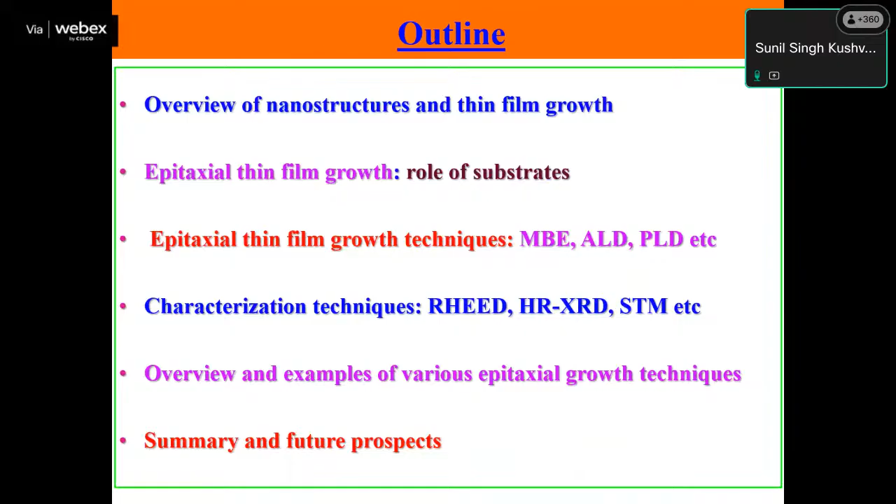Hello, yes sir, now your audio is really very clear, and we can see your screen. Okay, so now, sorry, I just connected with my laptop, so I will try to finish quickly. Sure sir, yeah, so anyway, so basically we know these nanostructures.

Now I am moving towards why these nanostructures make it unique and interesting. I think this talk has already been going on for the last almost 1 month. This is the quantum size effect, one of the parameters - the quantum confinement effect. This is the basis for having these quantum materials as well. Of course it depends on the dimensionality of the materials, whether it is three-dimensional, two-dimensional quantum well, quantum wires, or quantum dots. And then the density of states function changes clearly when we have a change in the system's dimensionality.

When we are going to fabricate these devices, or even futuristic devices based on quantum materials for quantum computing and others, there are two different approaches for fabrication. One is the top-down approach, where we use nanolithography, lithography, etching, and EBL systems for nano devices. For example, Intel's 45 nanometer technology is made using the lithography and etching process. Another approach is the bottom-up approach, using manipulation with STM, or even self-assembly processes.

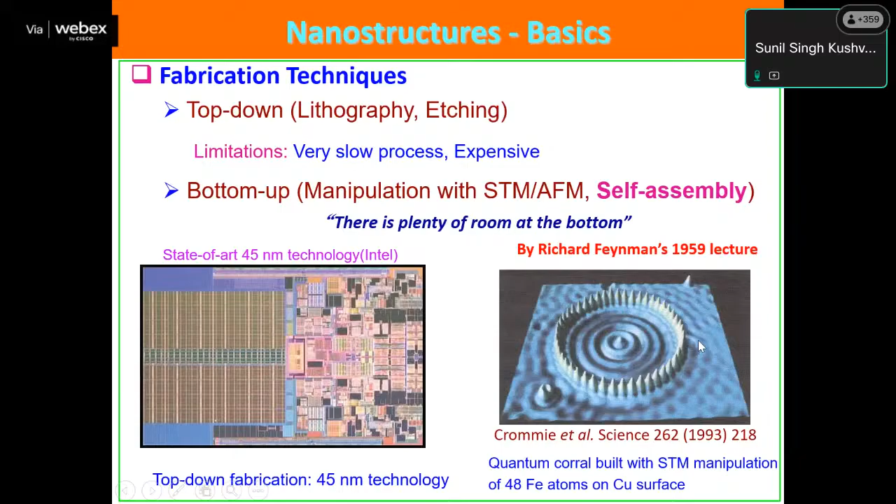You can see these quantum waves, meaning standing waves, inside the materials. That's another story, but today I am going to focus on why we are interested, especially in the epitaxial thin film growth of self-assembled nanostructures.

When we talk about self-assembly, it means it can be formed in the growth environment taking advantage of energetic, kinetic, and geometric effects. There is no need for lithography, and it is very low cost with a parallel process.

But the remaining problems we need to solve one by one are precise control of the size, shape, type, and location of nanostructures, and more importantly, understanding the growth mechanism.

This means we need to know how to control the morphology, or how we grow a single layer or multiple layers. It depends on knowing the kinetics, surface thermodynamics, and mechanics.

When it comes to real thin film growth mechanisms, there are three basic thin film growth mechanisms. One is called the Frank-van der Merwe mode, which we also call layer-by-layer growth.

In this case, what happens is when the substrate surface free energy is more than the interface and film energy, then your film grows in a layered structure. For example, we have grown gallium nitride on gallium nitride, and you can see this layered structure has been grown.

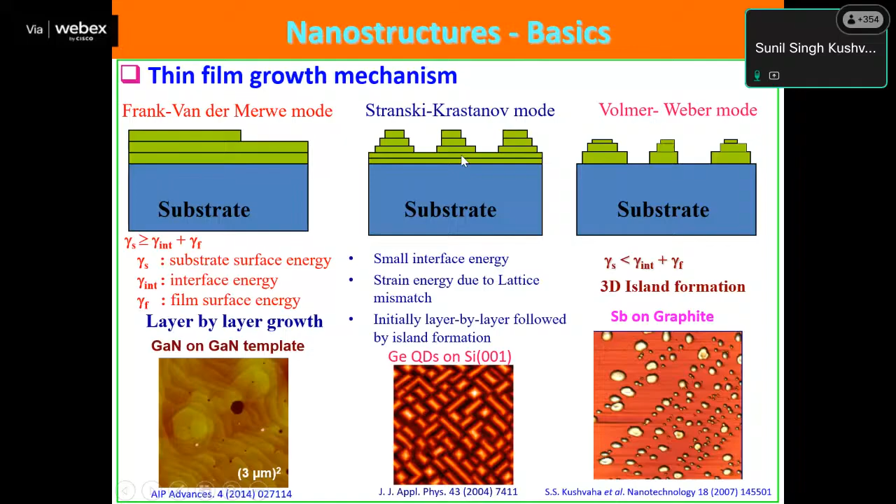Now, as my topic is to discuss different epitaxy growth systems, first I would like to give some idea of what we mean by epitaxy growth.

Generally, when we grow film on substrates, it depends on the growth temperature, growth rate, the substrate, and the growth technique. Accordingly, we get mostly 3 to 4 different kinds of crystalline structures when we talk about this.

One is the amorphous structure. People even use amorphous silicon for silicon solar cell applications, but for most devices we are not interested in growing amorphous structures, because these amorphous solids or liquids have no long range order. This means we don't know the quality, the morphology will certainly be different, and there is no periodicity or even local periodicity, making it very hard to know what we are growing.

Another is the polycrystalline film. So basically, this polycrystalline film refers to...

We have this different thin film composed of numerous small crystallites or grains, where the film structure can vary in phase content, nanoparticle size, and thickness, influenced by the synthesis conditions. And third is the single crystalline.

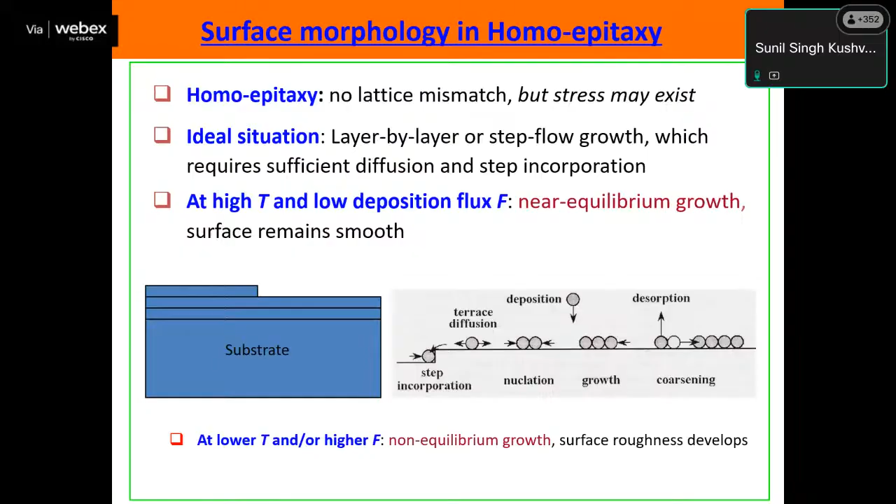So for example, at low temperature with high flux, you can get some kind of nucleation start, but again you have the layered structure. Here again you have this kind of pits or defects on the epitaxial layer. This means that with temperature and growth flux, the transition should not be transient, it should be very smooth. Whether temperature and flux are optimized determines how you can control the roughening of the substrate.

So of course that's one of the requirements when you are going for precise doping or making a smooth homoepitaxial layer.

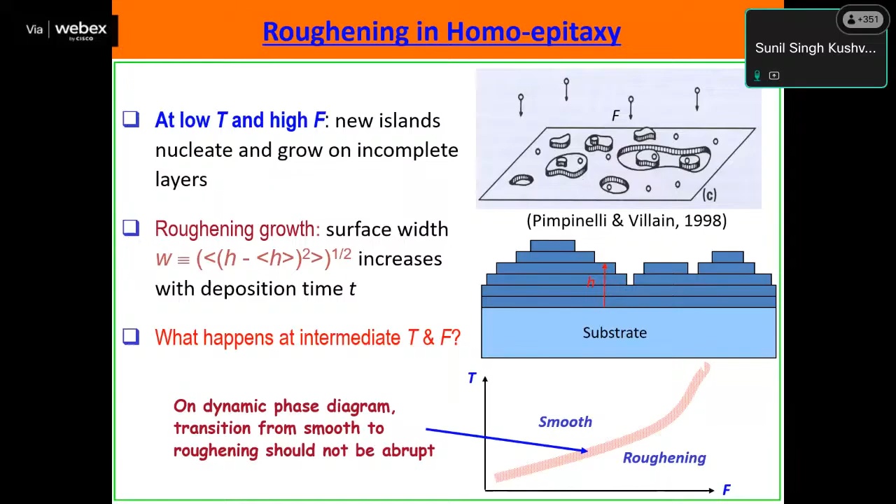So as I mentioned, this lattice mismatch is one of the parameters that people are always worried about. This is just one example of why we are so much interested in the lattice parameter with different materials.

So one example I have taken is the third nitride semiconductor. Here we can clearly see on the x-axis the lattice constant varying from 3.1 to 3.5 angstrom. But when we look at the band gap, it is changing from 6.2 to 0.7 electron volt. This means when we are making such kind of nanostructure epitaxial thin films of third nitride layers

like indium nitride and aluminum nitride, or gallium nitride and aluminum nitride, there will be low lattice mismatch. But you can change the huge property, so even if you are doping with indium or aluminum, we can cover the band gap starting from 0.7 to 6.2 for different purposes. So that is one of the beauties of making these different nanostructures, especially epitaxial thin film growth, having low lattice mismatch substrates.

So when we are coming toward this, how many techniques do we have? I have just written a few of them. This is one of the well known ones, molecular beam epitaxy, since epitaxy term is already here. Then chemical vapor deposition, also pulse laser deposition, and laser MBE, which is a new term combining PLD and MBE.

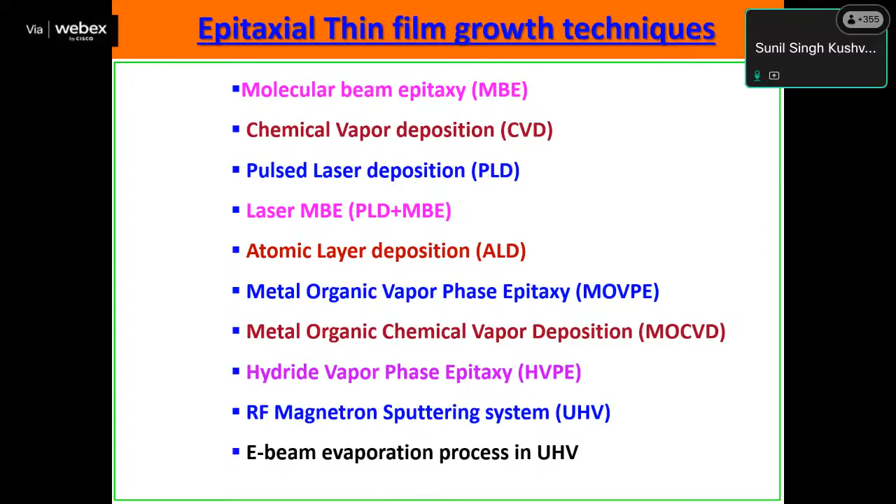So as I mentioned, UHV system, this is the system we call ultra high vacuum. So just as a basic, I wanted to highlight why we need this ultra high vacuum system, why we are not able to do this epitaxial thin film growth or thin film growth in the normal environment, like using some chemical route.

Of course you can do it, but regarding purity and control over precise thickness and an impurity free film, then you need some vacuum. So we started with the basic vacuum, like 1 atmospheric pressure to 10 minus 3 millibar. Then high vacuum, we can say 10 minus 4 to 10 minus 6 millibar. Then ultra high vacuum, it is 10 minus 7 to 10 minus 11 millibar.

So why do we need a UHV system? There are two reasons. One, you have heard about the mean free path. So when we have this vacuum region from 10 to minus 3, then your mean free path is around 5.9 centimeters.

But when you have more, like minus 8 to minus 12, then the mean free path in the vacuum is almost in the range of a kilometer, or at least more than 100 meters to 1 kilometer. So it means when you are growing some elements or some beams inside the UHV chamber, it is going to directly hit your substrate. It is not going to collide with other things or make anything else. That's the reason it mostly comes as a form of a beam.

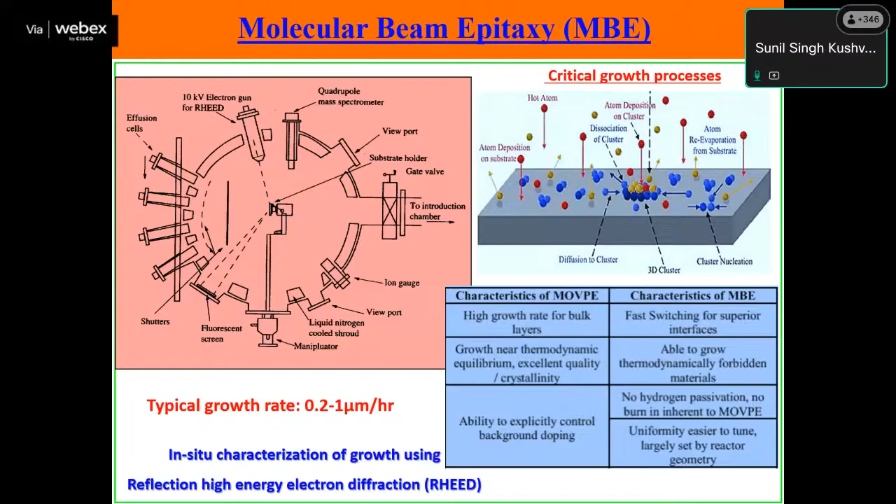I will show some examples of how important RHEED is. RHEED is generally called in situ monitoring. In situ means when we are growing the film, we are able to see the crystalline structure.

What RHEED can do: we can use it for substrate thermal cleaning monitoring, because we need to clean our substrate not only outside using acetone, HF, and other things, but also inside the chamber. We heat for thermal cleaning, up to 1000 or 850 degrees. For example, to remove silicon oxide from silicon, we have to heat to 850 degrees, because whatever cleaning you do, when loading inside the chamber, 2 to 3 nanometers of silicon oxide will still be there.

So to remove that silicon oxide, we have to clean inside the vacuum at around 850 degrees in UHV, and then we are able to see clear, silicon oxide free silicon. Then again you can monitor using RHEED.

Then there's controlling initial growth stages, where we can see whether it is growing or not, or making different phases or not. Of course we can also monitor surface structures, and do growth rate measurement as well.

So basically, how does it work? We use an accelerated electron beam in the range of 5 to 30 keV, though some systems have 100 keV, with a very low glancing angle, less than 3 degrees. This means we are able to see only the surface. I will show this in the next slide.

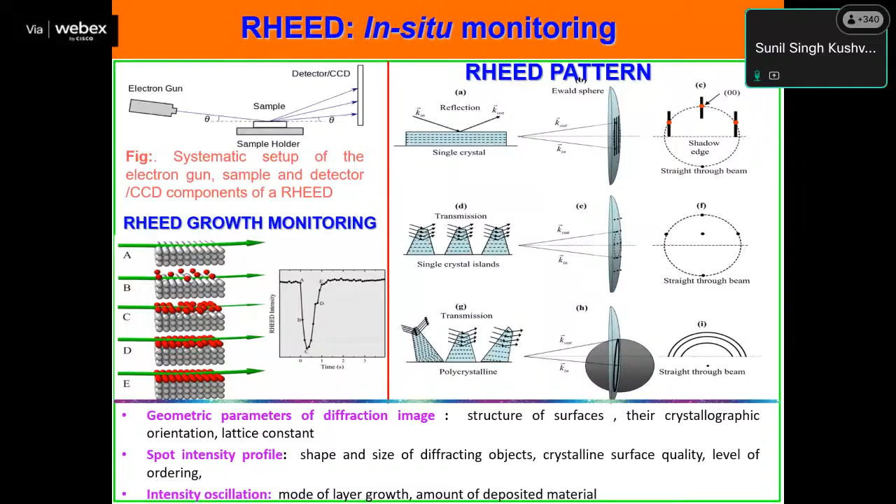As I mentioned, molecular beam epitaxy is an epitaxial growth technique used to deposit thin films of single crystals. And these are some of the K cells, also called effusion cells.

Then you have the substrate. The substrate can be heated up to 1000 degrees, depending on the purpose of growing this epitaxial film. Mostly we heat the substrate up to 1000 degrees because we want to clean the substrate by thermal heating, like removing silicon oxide from silicon, for which at least we want 850 to 900 degrees, and for other purposes.

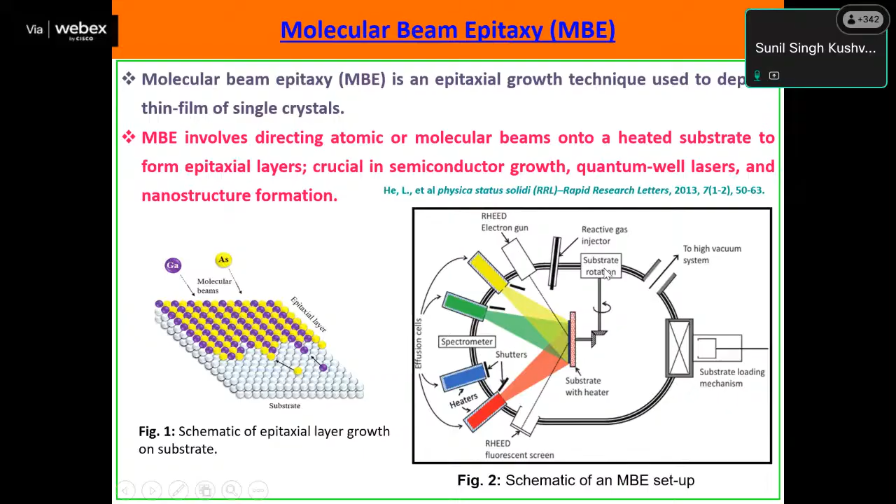And then you have the RHEED, and from here you can monitor how the growth process is happening. This is just another view of the picture. We clearly see here the substrate, and one of the...

Mostly these kinds of techniques, MBE, they have rotation also. It means during the growth, your substrate will be always rotating, so you have more uniformity. If there is no rotation, there are chances that maybe one place has more growth and another place has less growth. But once you have rotation, you have uniform growth.

This effusion cell, when we talk about it, basically helps to generate the molecular beams. This process happens when you have high purity solid materials like gallium, arsenic, heated until they begin to evaporate. It depends on the vapor pressure of the materials. Accordingly, we have to heat these materials, and inside the cell, the material reaches a specific vapor pressure, and because the cell has a small opening leading into vacuum, the atoms effuse out.

As I mentioned, we are doing the process in the ultra high vacuum system. It means there is no scattering or anything happening to your beam, and it goes directly to the substrate. That is what we call ballistic transport.

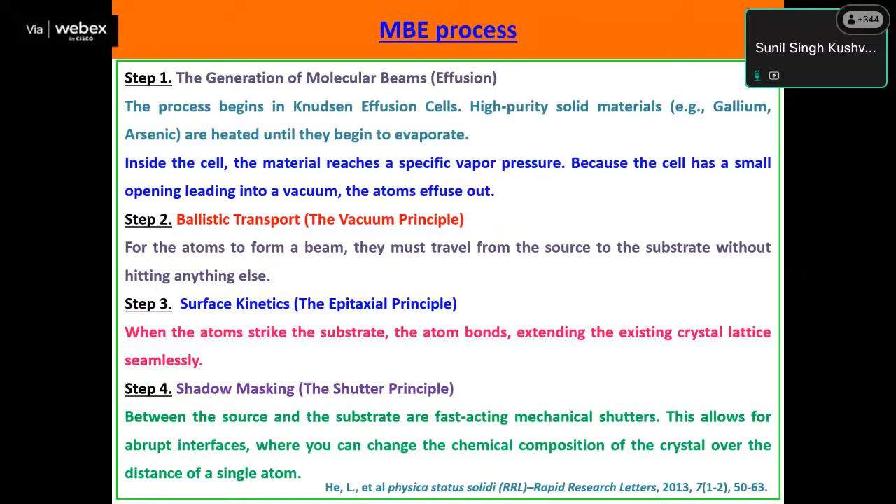When we talk about the advantages, of course it has various advantages. You can grow with great uniformity, even precise control over film thickness. You can even grow one monolayer. That's how precise MBE can be.

But of course there are limitations too. This is a very slow deposition process, and the equipment is very complex and expensive. So it depends on our application. If we're going for solar cells and similar applications, we're not worried about MBE. But when going for quantum devices or the quantum anomalous Hall effect, or other purposes where this kind of epitaxy is really required, then definitely we have to go for the MBE system.

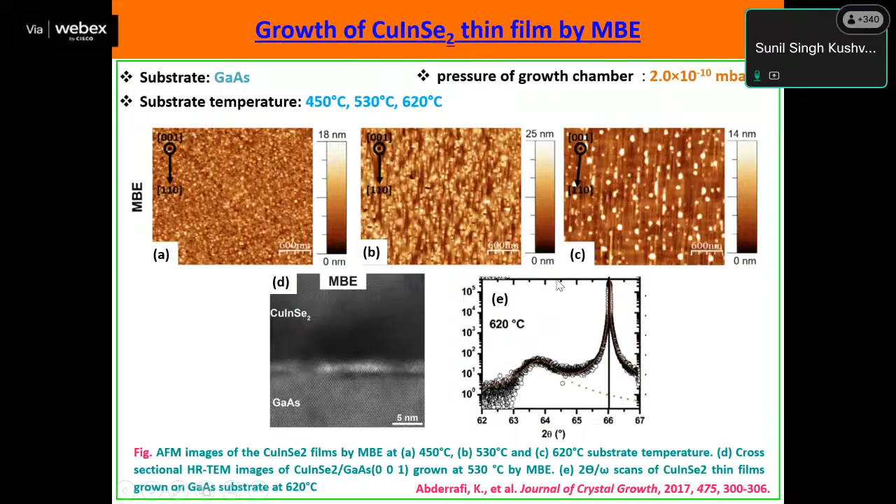We have also grown gallium nitride on gallium nitride. That is an example of homoepitaxial growth. Before that, we have this very high quality 2D gallium nitride on sapphire substrate.

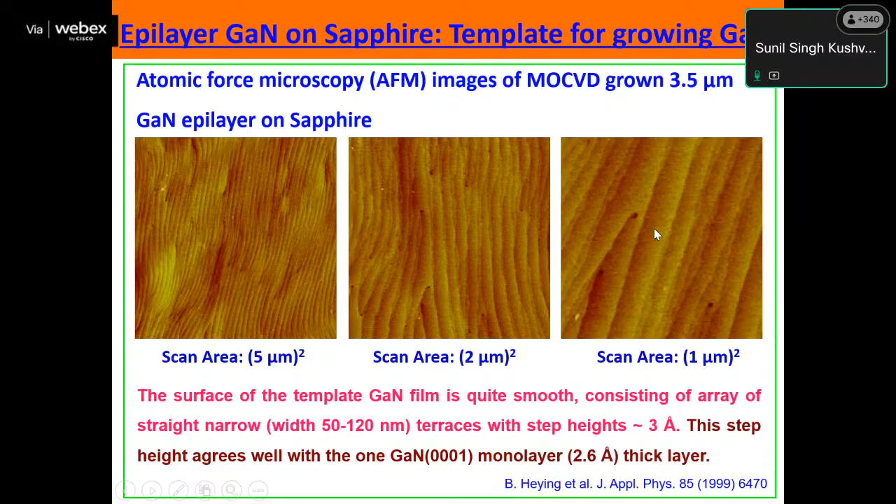After that, we grew with the plasma enhanced MBE system at 730 degrees. We can clearly see the terraces are increasing, but the pits, some kind of hexagonal small pits, are forming. So for that reason we again changed parameters, keeping everything else the same.

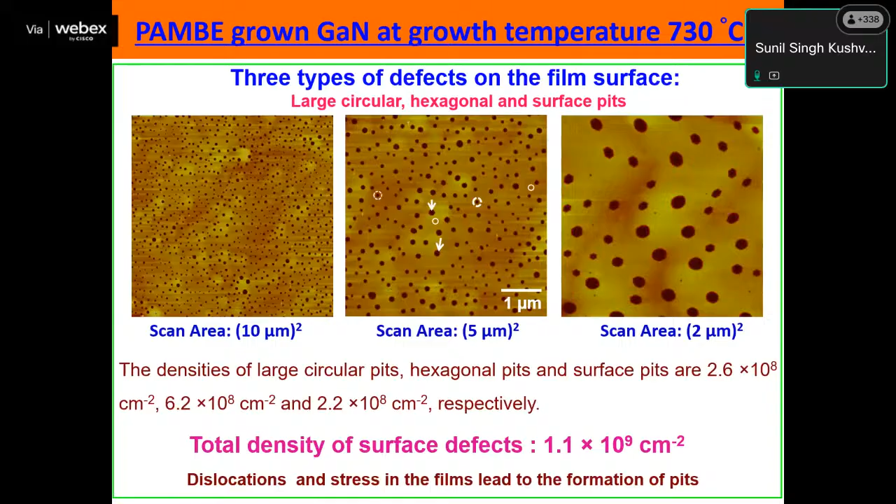We changed the temperature from 730 to 750 degrees, and here we are able to see these defects, especially the larger ones, are minimizing. In case of 750, we can clearly see we are getting very high quality and larger terraces. For that reason we are able to make devices on a large area, because we want a large smooth area.

There is another approach where we can have different dopings. Then we can make PN junctions and other kinds of devices, or even for LED and other applications.

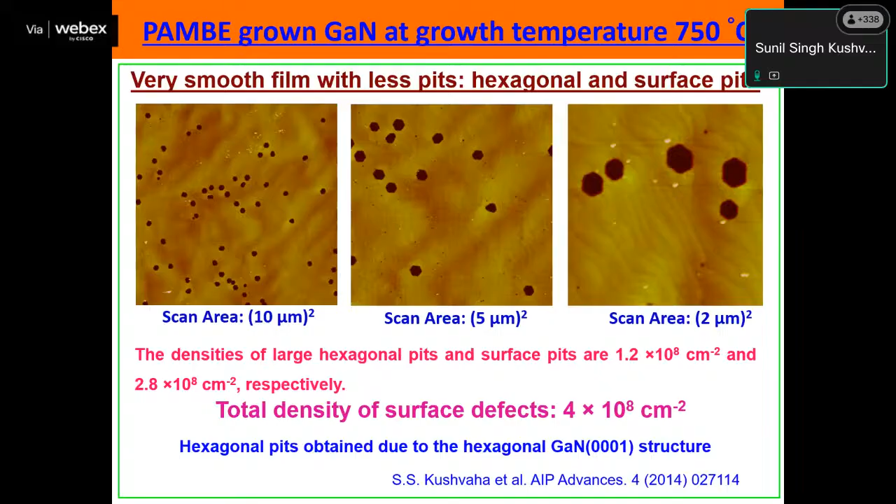So another system I will discuss is pulsed laser deposition. This is again a physical vapor deposition technique in which high energy laser is focused on a target material. For example, you have a target and a substrate, and here you have the laser. The laser falls on the target, hits it, and this laser plume comes out, and on the substrate you are growing the film.

If you see MBE and PLD, there is one difference. In PLD, we are working in a high vacuum system. It is not required to be an ultra high vacuum system. But I will also show some examples when we have PLD in an ultra high vacuum system.

Here, instead of the Knudsen cell like in MBE, you are using this laser on the target material. Then accordingly you have the laser, and then you have the substrate. This has the advantage of PLD, because already you are making these energetic particles coming from the laser. It means you have high energy kinetic particles going to the substrate, which means you are going to reduce the growth temperature of the film. So that is one of the advantages of having PLD.

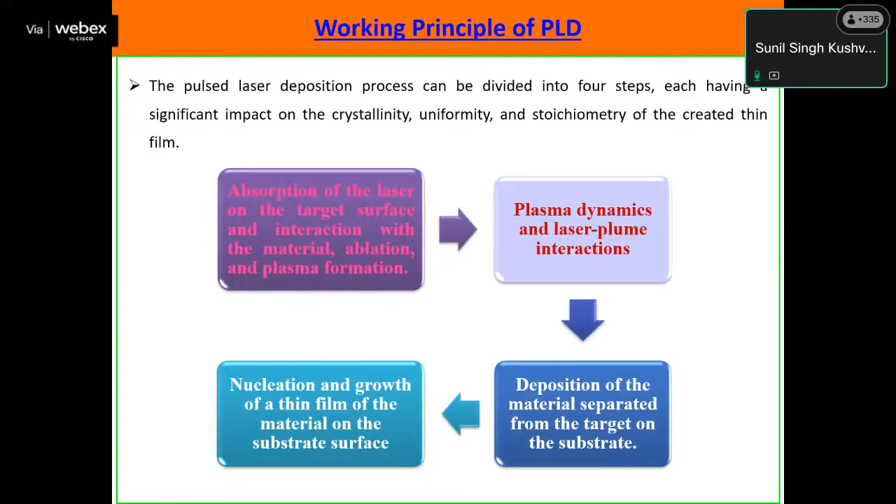There is some physics of laser ablation here. When the laser falls, generally we have a nanosecond pulse laser, then surface absorption and material excitation, then thermal evaporation, then plasma absorption and self-regulatory regimes, and accordingly going into the millisecond regime you have the plume. This is one process. We are giving pulses in the nanosecond region, so there is no delay, and for that reason we are getting a continuous field.

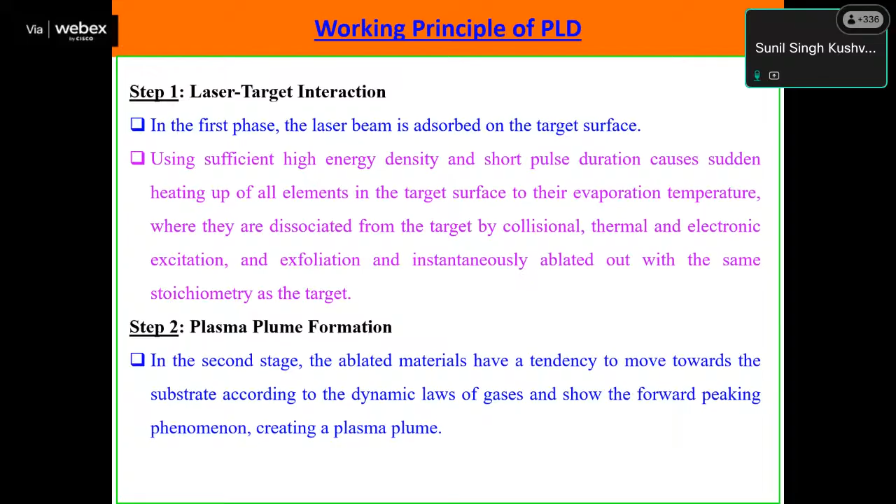As already mentioned, I'll just skip that. This is the same procedure as when we have deposition on the substrate: cluster nucleation, then diffusion to clusters, then forming different clusters, and finally making the thin film on the surface.

Generally we are talking about which laser is commonly used in PLD. It depends on the application. Most PLD works use different UV wavelength sources, like the 308 XeCl, then 248, which is the KrF laser, ArF region 193, 157 nanometer. But also some people use the Nd:YAG laser. So that is one of the principles - we have to select.

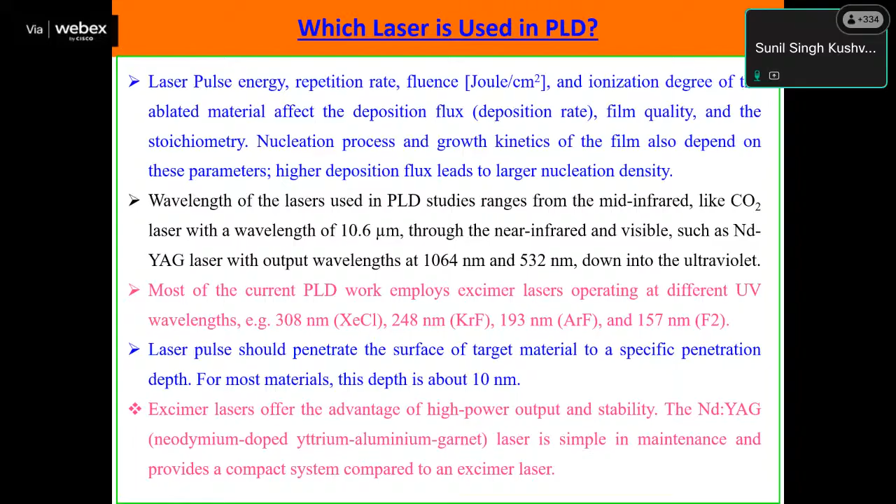When we have these excimer lasers, they have the advantage of high power output and stability. In case of Nd:YAG, it is simple and very easy to maintain compared to the excimer laser. So it depends on our budget and our application - accordingly we can select the laser.

As I mentioned, the advantage is having control over the growth temperature, and we can use materials that can't be grown at high temperature in MBE and MOCVD. You can use PLD for low temperature growth.

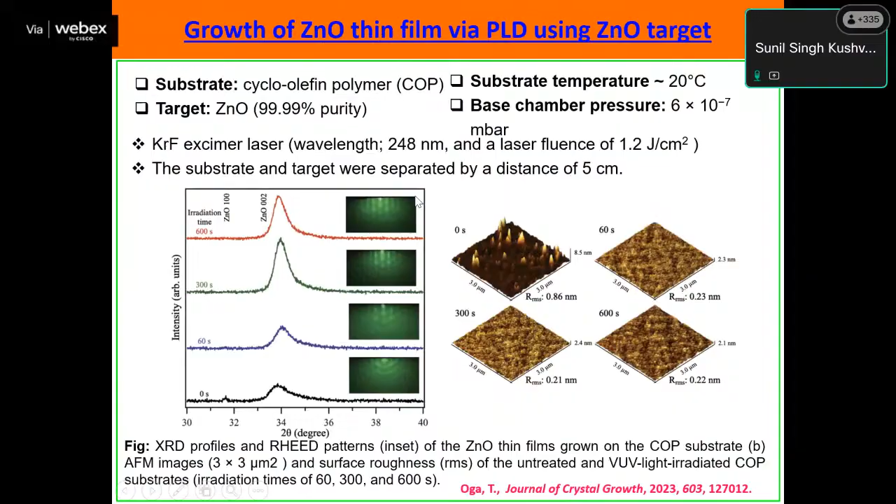One example, this is also equipped with RHEED. Even you can make ZnO thin films using this PLD. So as I mentioned...

Now it comes time when we can combine PLD and MBE growth techniques together. Already I mentioned this is the PLD, this is the MBE system. But what happens when we have all the systems similar to the MBE, but instead of an effusion cell, we change only with the PLD targets - then we call it the laser MBE process.

This is the system that we already have at our national physical laboratory, and this is our real system, meaning schematic. So of course we have the load lock chamber.

I forgot to mention that in the MBE system or any kind of such system, basically we have two, at least minimum two chambers. One chamber is called the load lock chamber, another chamber is called the main chamber or growth chamber. And here we have the gate valves.

So when we are putting the substrates, first we transfer from the vacuum, atmospheric to the load lock chamber. Then we start the load, and the gate valve is already closed. This chamber mostly always, 24 by 7, has the ultra high vacuum system, 10 power minus 10 millibar vacuum inside. Once we have all this process, we can even heat up to some degree, like 100 to 200 degrees Celsius of the substrate. This chamber also has the roughing and turbomolecular pump, so at least it will reach to the minus 5 to minus 6 range.

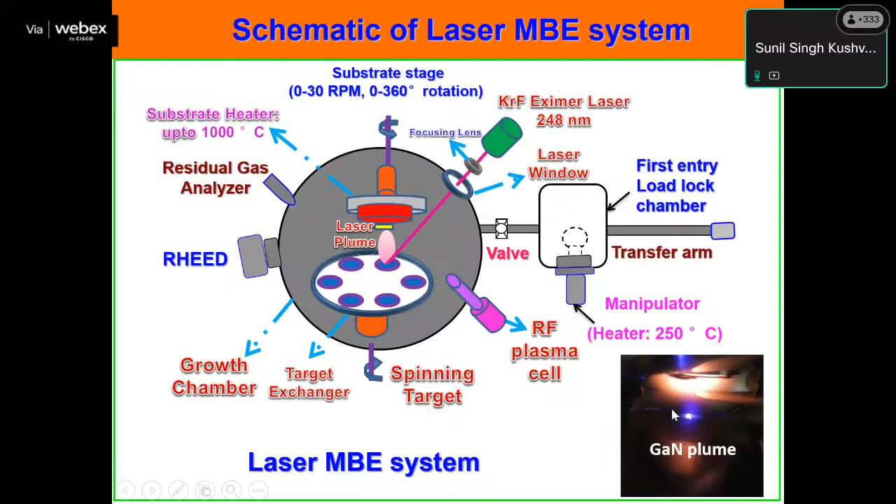We even have different targets. We have this liquid gallium target, and also this solid HVPE-grown gallium nitride target, and depending on the application, accordingly we are selecting the targets to make the film smooth or with nanostructures. So we have different targets.

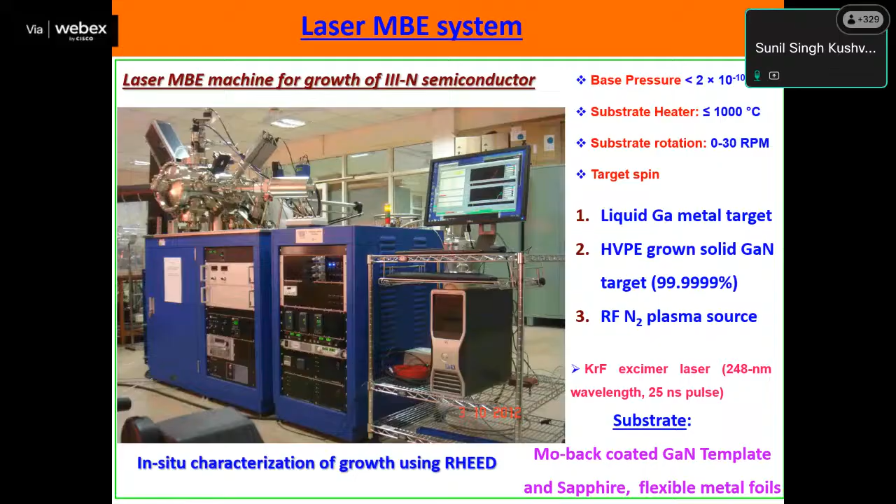Even after that, we have done surface nitridation. Because it's aluminum oxide, we put nitrogen on top, making aluminum oxynitride. Then we get an almost smooth surface, meaning the surface roughness decreases.

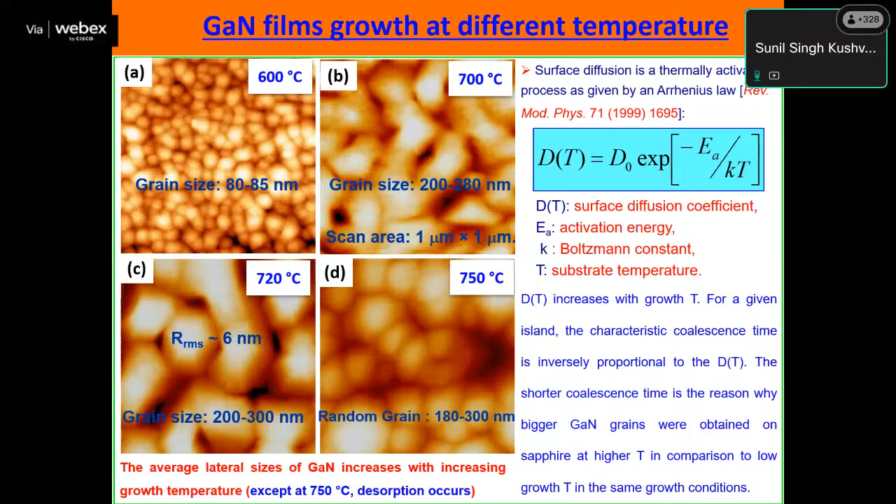So I already showed this. Then one of the parameters we use is mostly XRD, to know whether our crystalline structure is good or not—that is the HRXRD. In HRXRD, again we have different modes. There's the 2-theta scan to determine the crystalline structure, whether it is amorphous, polycrystalline, or single crystal. Then there's the phi scan, which determines the degree of in-plane alignment of the film relative to the substrate.

And the third, more powerful technique, is the rocking curve—the X-ray rocking curve. From this, using the FWHM value, we are able to determine the dislocation density. This again depends on the material; for example, for gallium nitride, there is a specific equation for the screw and edge dislocation density. So this is one of the powerful techniques for knowing the crystalline structure or crystalline morphology.

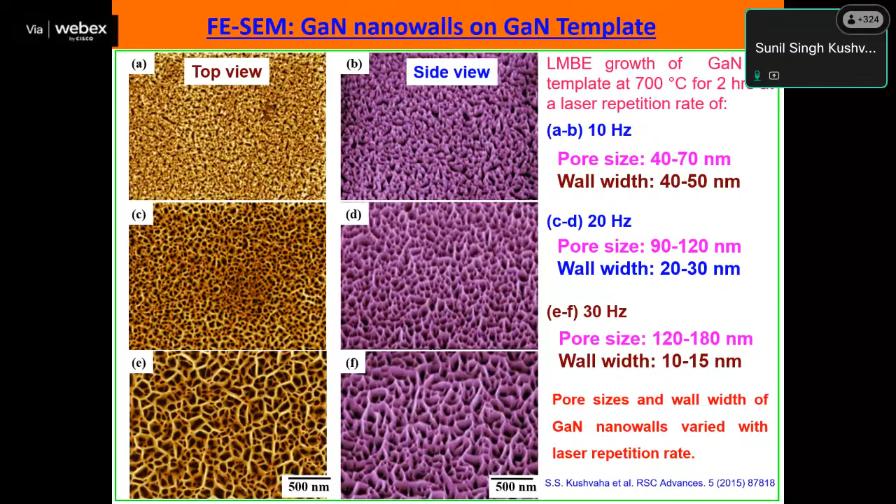This is mostly coming from the quantum size effect, because the tip width of the nanowall is around 10 to 15 nanometers, which is comparable to the Bohr exciton radius of gallium nitride, that is 11 nanometers. So this is one example where we can see quantum confinement and quantum size effect even on the gallium nitride nanowalls grown using this laser MBE.

So again, we have done different nanostructures. It is not necessary that we can only grow gallium nitride on sapphire using only nitridation, but we can also use a buffer layer. For example, here we have grown sapphire, then nitridation, then after this an aluminum nitride buffer layer, then we have grown the gallium nitride. So it depends on the application, and accordingly we can go for different nanostructures.

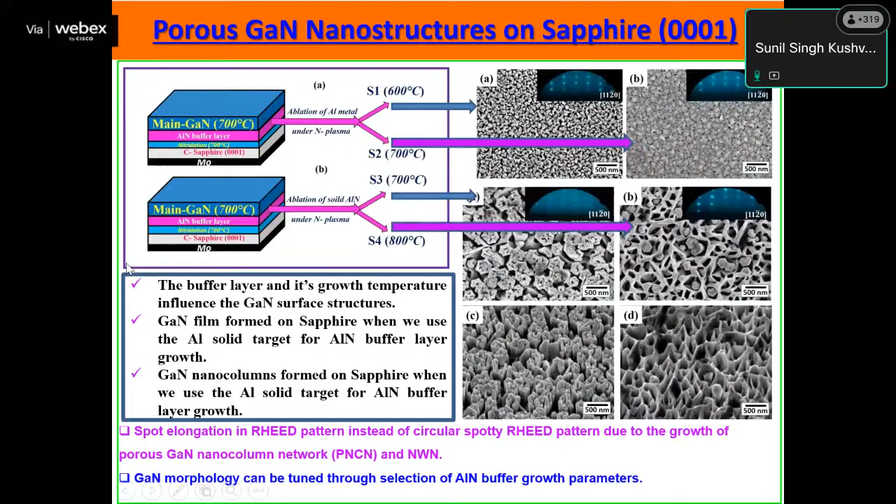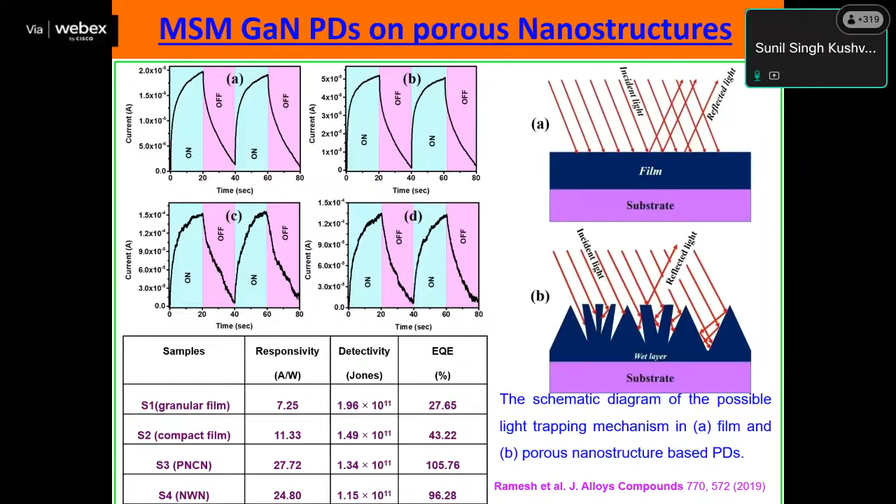So we have done some kind of device fabrication. I will just skip this one, and then we have grown different nanostructures on different substrates. I'll skip this one and go to the last.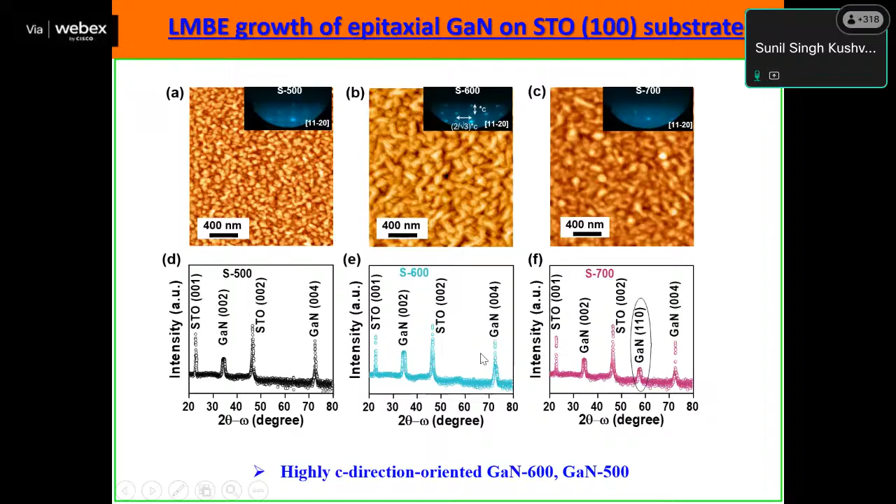So from here, we are able to control the growth of the gallium nitride film at low temperature in the laser MBE system, and with RHEED even before doing the AFM, we know in the process that mostly we are going to get this smooth film. So this is the first part.

I finish. Can I take a 2 minute break? Then we can start another part. Yes, sir, sure, we can take a 5-minute break here and then start again for the second row. Okay, thank you.

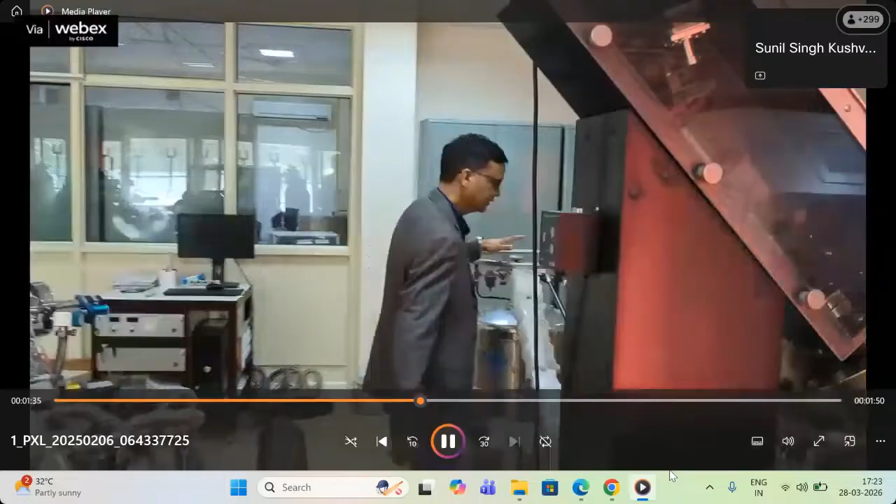So we don't want to contaminate this chamber. For that, we have this liquid nitrogen. From the liquid nitrogen, we can flow the nitrogen from here, and it will be cooling our chamber. This is to minimize any kind of contamination.

So as we know, for gallium nitride, we have the gallium nitride target, and then we have the nitrogen plasma. This is our nitrogen plasma cell. From here, we can generate this RF nitrogen plasma.

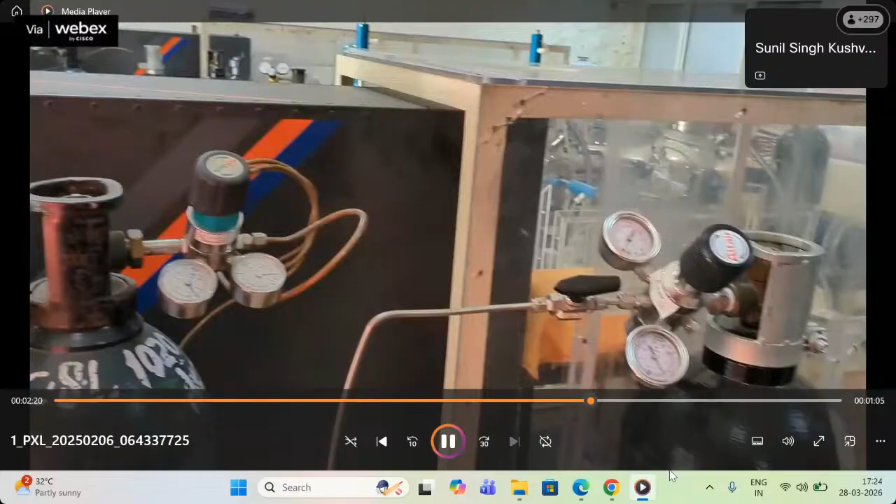And for this sputtering, for the first delivery portion, we want the laser. This is the entry point for the laser. So we have this laser, and from there it goes into the system, and also for this one.

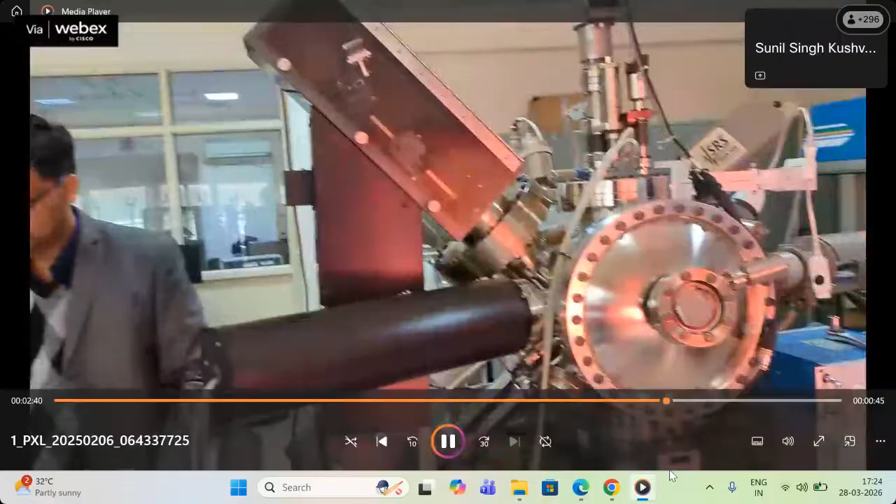Then this laser comes here, and then the laser will go from here, then it will go further. So this is one of the arrangements where even one laser can be used.

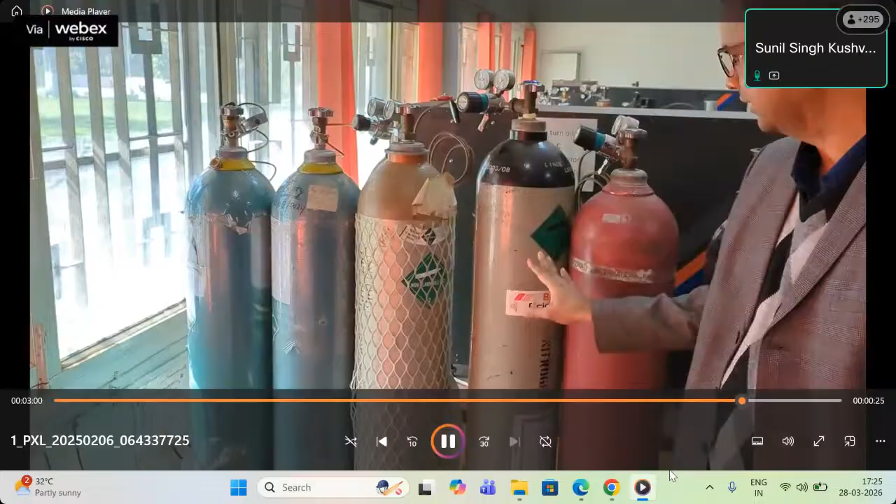Because this laser is very expensive. Like with this laser, you can see how many cylinders we have - we have 1, 2, 3, 4, 5, 6, 7 cylinders. Out of this, of course we have nitrogen, then the mixture of krypton and fluorine. So that is our KrF laser.

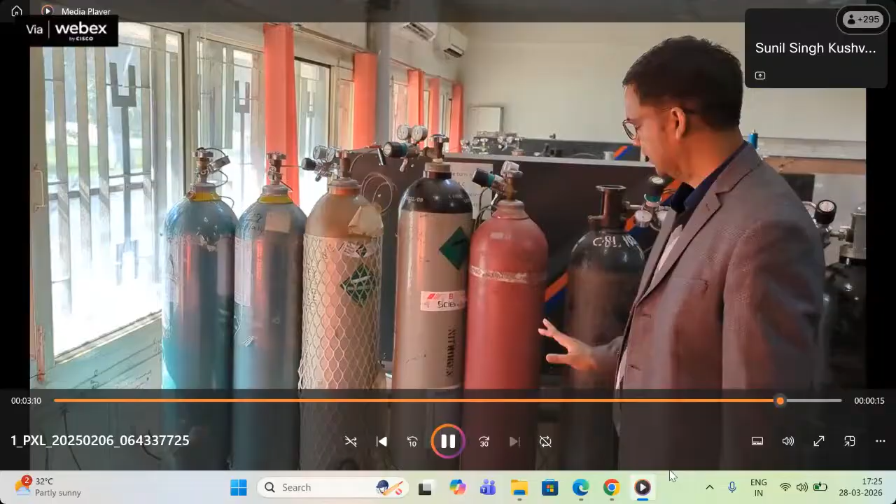So of course, we can see other lab, other facility as well. So I will go to the other one.

We can go to the nitride field, then also we are able to go to the oxide field. For the oxide field, this system also has a pumping system, and then we have this.

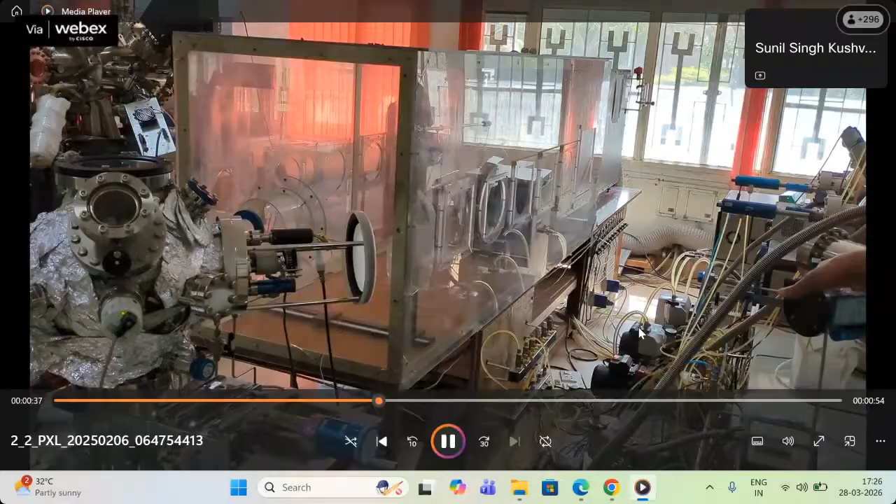Then again this laser will come directly from it - the same laser we can take to the other chamber. And we have two lasers.

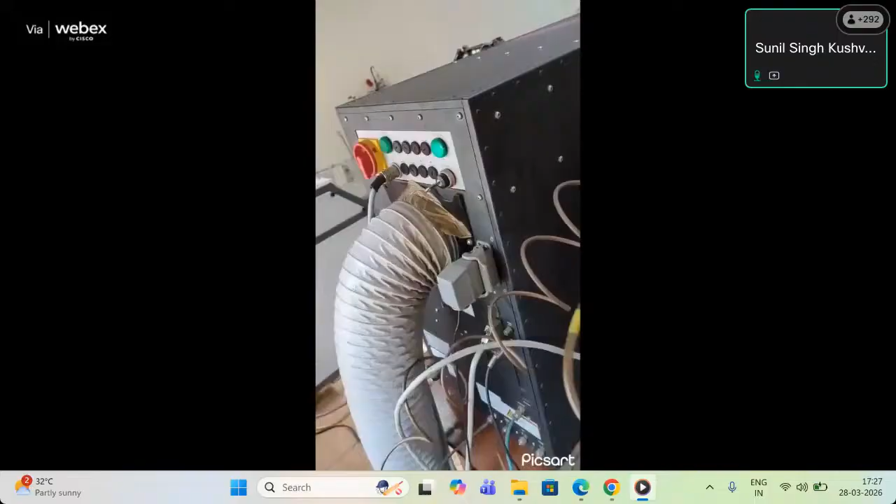First of all, to make it on, we have to switch on the main power button, and then we have to switch on this one, the main, and then this key. We have to put this from 0 to 1. Okay, it means that the laser is started.

So we will talk mainly about the KrF laser. Its wavelength is 248 nanometers. So we have already built the KrF laser, but it is a poisonous gas, so we have to use the exhaust, which goes from here to outside, so that we do not get contaminated.

So the second thing we have to keep in mind is that we have to use the chiller if we are using the laser above a frequency of 10 hertz. But if we are using it below the frequency of 10 hertz, then there is no need for the chiller.

So to make it on, we will press this power button, then enter, then execute. So we will wait for the laser to be on. After the laser is on, we can hear the sound of tick, tick, tick.

As we can see on the display, the frequency is 10 hertz and the voltage we are using is 22 kilovolts, and it is showing the energy. But on the window, we have to measure the energy that we are actually getting on the window.

KrF excimer with wavelength of 248 nanometers range. The energy is tunable per pulse, and the frequency also we can vary per hertz. The energy of this laser also ranges. So while deposition, we should take care of our eyes by wearing these goggles.

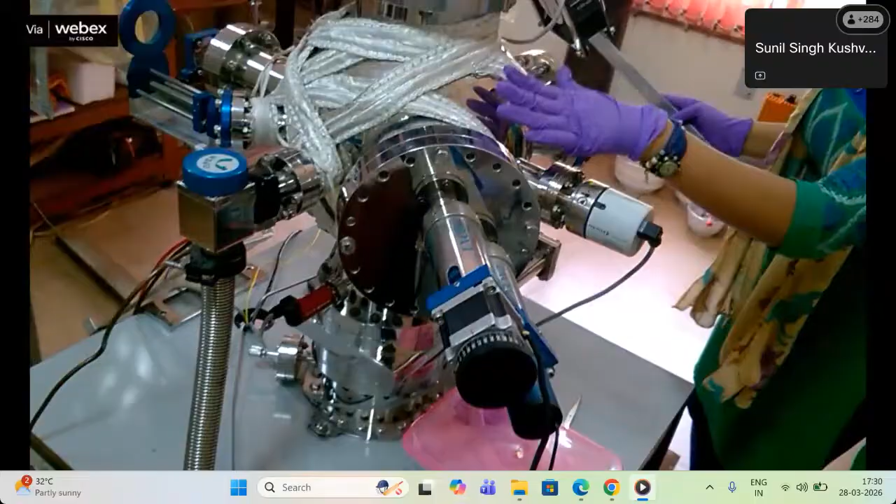This is our deposition chamber, which is connected to the vacuum pump through this line, and we can create vacuum during deposition up to the order of 10 to the power -6 millibar. This is our target stage, connected to motors, and we can rotate the target during deposition. These are the vacuum gauges, which we use to monitor the vacuum inside the chamber.

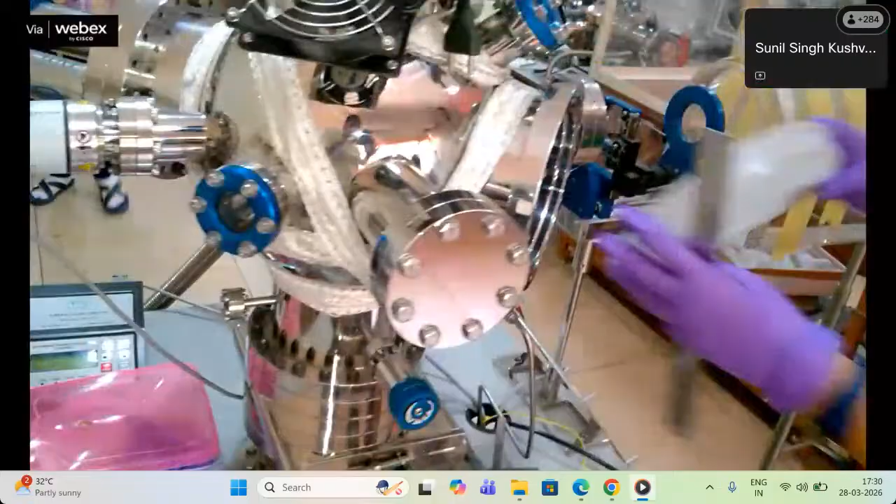This is our target carousel, on which we can place 6 targets, and we can deposit multi-layers also by ablating one target at a time.

Coming to our substrate heater, this is the shutter of the heater, which we remove during deposition, and this is our substrate, which I have pasted on the heater. We can heat the substrate also up to 800 degrees Celsius. Now I'm going to load this substrate inside the chamber.

Now we need to create vacuum inside the chamber, so I will open the valve with which the pump is connected. Right now I'm opening the valve.

We can control the deposition time according to the desired thickness of the material.

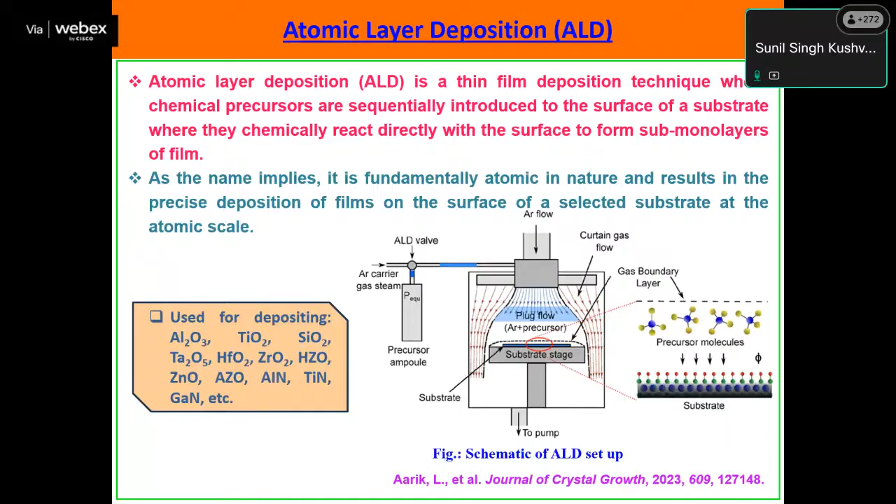Different techniques have different advantages. From ALD you can grow nitride and other materials, but mostly ALD is used for oxide materials like aluminum oxide, titanium oxide, hafnium oxide, zirconium oxide. When making MOSFET devices, these high K dielectric oxide materials can act as the gate dielectric. So that is one reason ALD plays an important role.

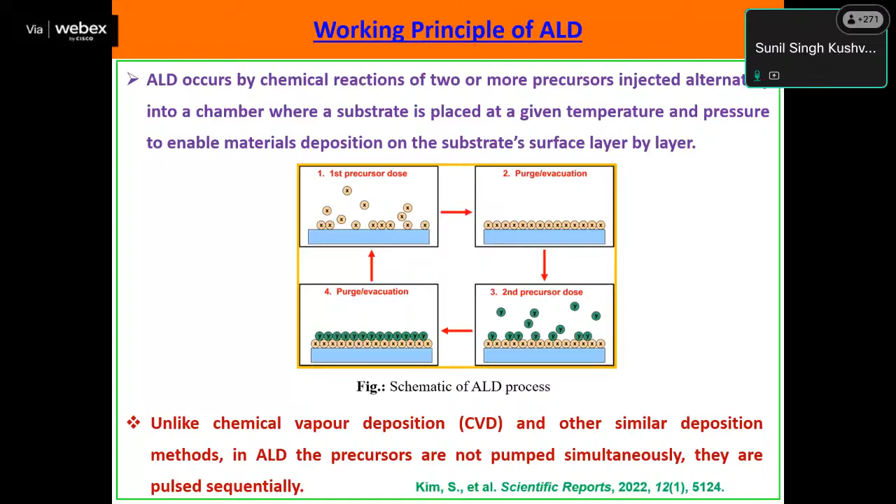Unlike chemical deposition, ALD precursors are not pumped simultaneously, but pulsed sequentially. So you have different precursors depending on what kind of oxide you want, like HfO2 or aluminum oxide. Accordingly you select the materials and proceed with growth of these materials using ALD.

The process is precursor A pulse, then purge, then precursor B, then purge. You have to follow this process, and then depending on what thickness you want, 1 to 2 nanometers, 10 nanometers, whatever the application, you need a procedure to know which sequence and how much thickness you can grow using the atomic layer deposition system.

The first advantage of atomic layer deposition is control of film thickness, even down to 1 to 2 nanometers. Then there's excellent repeatability, and moreover it requires very low temperature processing compared to other CVD processes.

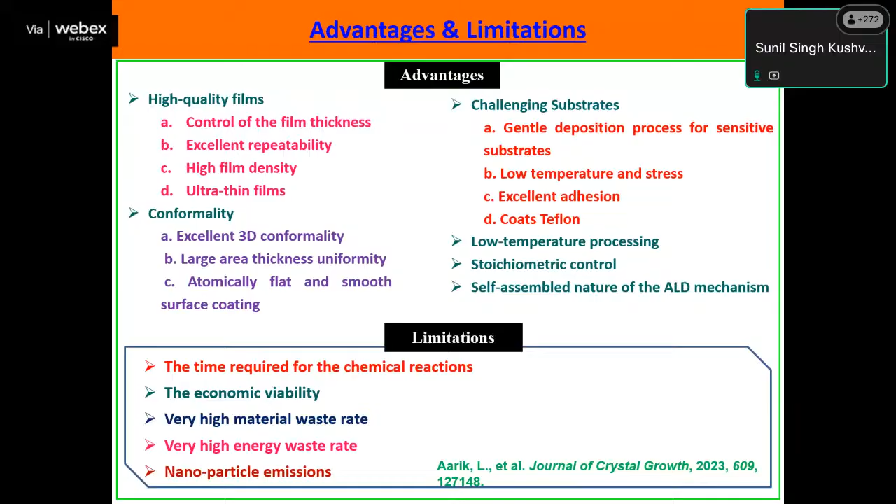A limitation is the time required for the chemical reaction. You also have to know the recipe and what material you are going to use, and accordingly see how many cycles or how much process you have to follow.

There are different ALD processes. One is the thermal ALD process, using normal heating around 150 to 350 degrees Celsius, where a variety of materials can be deposited. Mostly this is used for oxide materials. People have tried some nitrides and metals, but that's not too useful, since it's better to grow metals using an evaporator or sputtering system. So ALD is mostly useful for oxides.

Another process is plasma enhanced ALD. Plasma provides energetic particles which allow us to lower the temperature. So even with plasma enhanced ALD, we can grow films at room temperature, which is one of the advantages of this system.

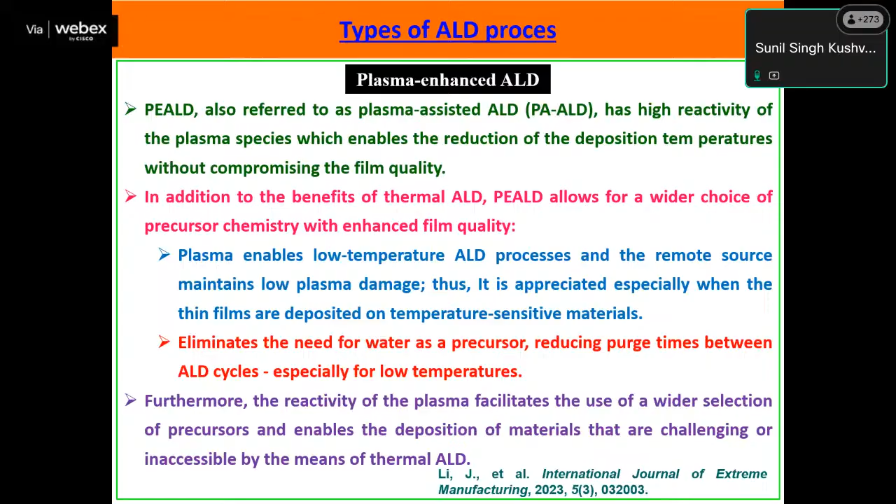Here is an example: at NPL we also have an ALD system for growing aluminum oxide, hafnium oxide, and even zinc oxide. As I mentioned, you have to select from many precursors. For example, for aluminum oxide it's an aluminum metal organic precursor, like dimethyl aluminum butoxide, along with water vapor, plus specific deposition pressure and temperature depending on whether it's thermal ALD or plasma enhanced ALD.

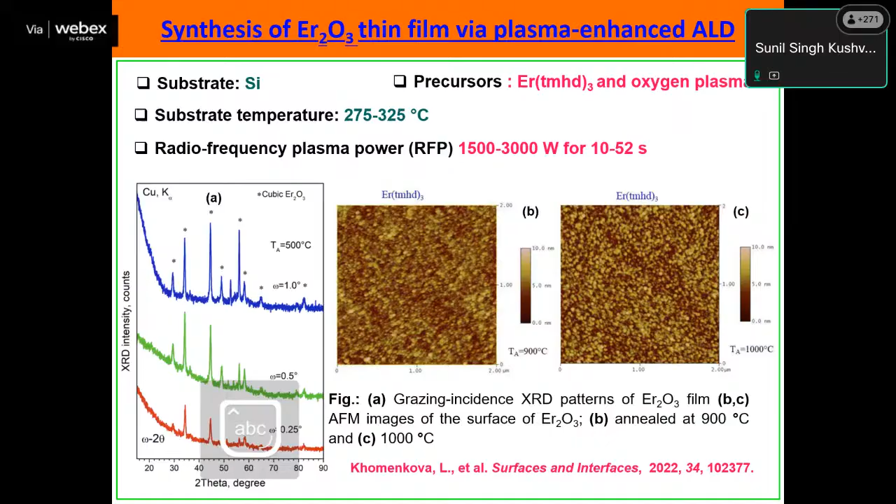So next, I am going to talk about the CVD process. Of course, before CVD, we recently started the mechanical exfoliation when these 2D materials came into the picture.

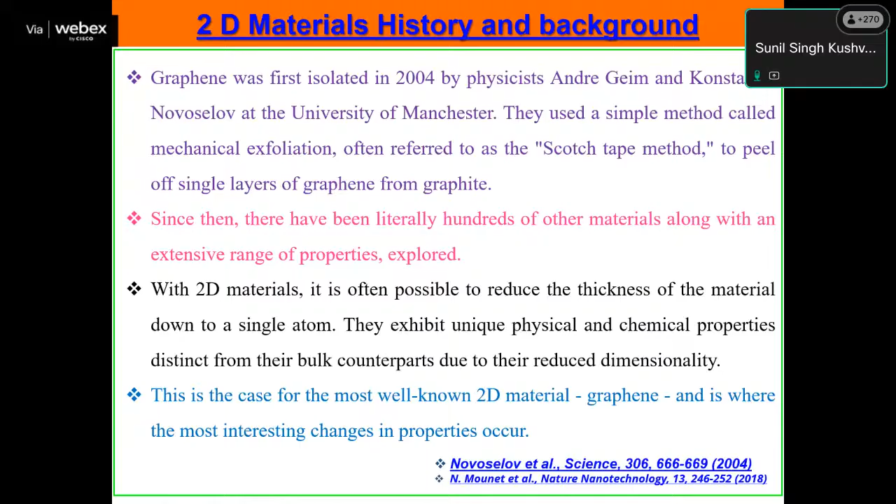People started with 2D materials, or maybe once graphene was invented in 2004, people started to work on different 2D materials. So it's not just graphene. After that, in any lab, we are going toward all these materials.

First, we started with compound semiconductors like HBN and other things to get 2D materials. But nowadays, another example is transition metal dichalcogenides, where we have the whole family like MoS2, WS2, MoSe2, WSe2, and other materials.

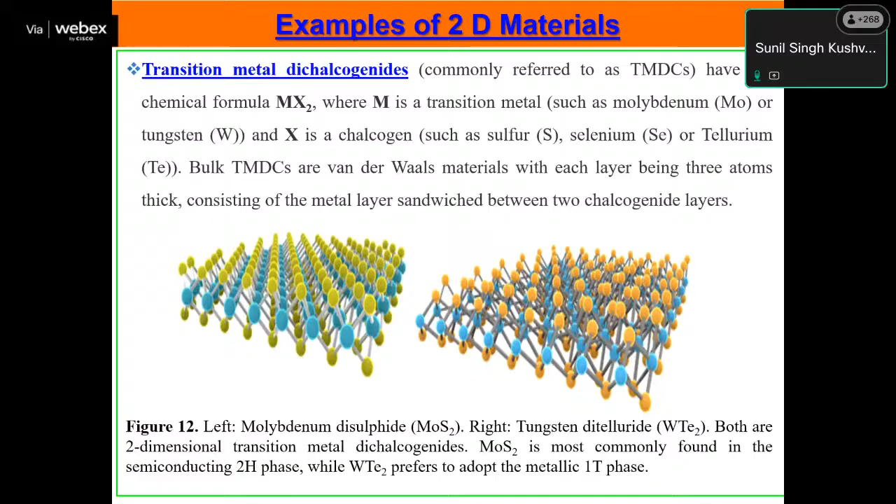Interestingly, now people, as they found from graphite to graphene, have started making monolayers of each element. So now the family of 2D materials is growing day by day.

People started with phosphorene, which is the single layer of black phosphorus. Later on, they got even the monolayer of silicon, that is silicene. Then germanium, they got germanene. Then tin, they have stanene. Even MXenes and others are coming into the picture.

So the problem is how we are going to make this single layer or monolayer of these kinds of materials for different applications. One approach is what they used in 2004, Andre Geim and Novoselov, using the Scotch tape method, which we call mechanical exfoliation.

So what we do, for example, in the case of graphene, we have highly oriented pyrolytic graphite, that is HOPG, and then you put the Scotch tape and remove one layer. If you are lucky, you can get this one layer.

But the problem is you don't have control over the size and shape, because sometimes you can get maybe 1 micrometer by 1 micrometer, sometimes you can get 5 micrometer by 5 micrometer. But if you want to make some devices, you have something in mind, like I want 5 micrometer or 10 micrometer.

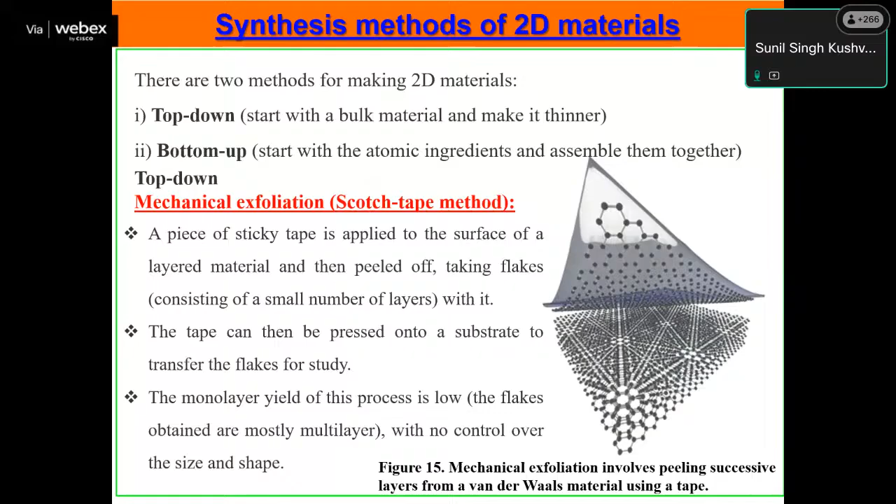So that's the reason mechanical exfoliation, for basic purposes, we can use, but for devices and other applications, you have to go for a reliable technique. So people use liquid exfoliation, but again, liquid exfoliation or liquid process mostly has more chemical compounds and contamination. So that's the reason it is not appreciable to have liquid exfoliation.

So now, of course, we can't do any good research without involvement of chemistry, meaning our chemistry people and faculty. So this is one of the techniques, that is we started the chemical vapor deposition.

This means we have different precursors, like we can use selenium powder or sulfur powder, and then we have the substrate or whatever we want to grow. Accordingly, we can make different kinds of chemical processes, that is chemical vapor deposition, like heating at different temperatures, blowing different gases.

It can be at atmospheric pressure, or it can be even low pressure vacuum, that is called LPCVD, meaning low pressure CVD process. And from here you can make different structures, whether you want layer by layer, like this is Mo and then sulfur, then you can make MoS2. But if you want a different structure, you can even make vertical, in-plane, or super lattices.

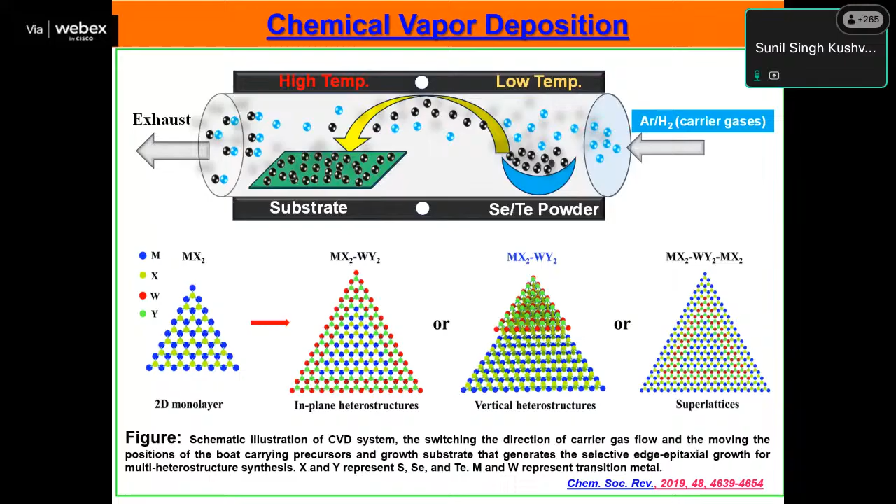In the chemical vapor deposition process, it depends on what kind of carrier gases you have, because sometimes the carrier gas will not only help to flow, meaning carry your materials from one place to another, but also helps to clean or etch or remove material on top of the surface. For example, if you have a mixture of argon and hydrogen, then you are even cleaning the substrate or making some nucleation sites.

So that's the reason we have to select what kind of gases we are going to flow, and accordingly how many zones. Basically people have single zone CVD, two zone CVD, three zone CVD, depending on the application. For example, in two zone CVD you have the precursor and the substrate, but in some places you have three zone CVD because you have two different precursors and want two different heating zones. It is not necessary that you can heat only one material. If one material needs 400 degrees Celsius and another needs 600, you can't use the same zone. That's why you make two different zones for two different heating, depending on the growth temperature, and accordingly you can heat the substrate also. So ideally people have the three zone CVD.

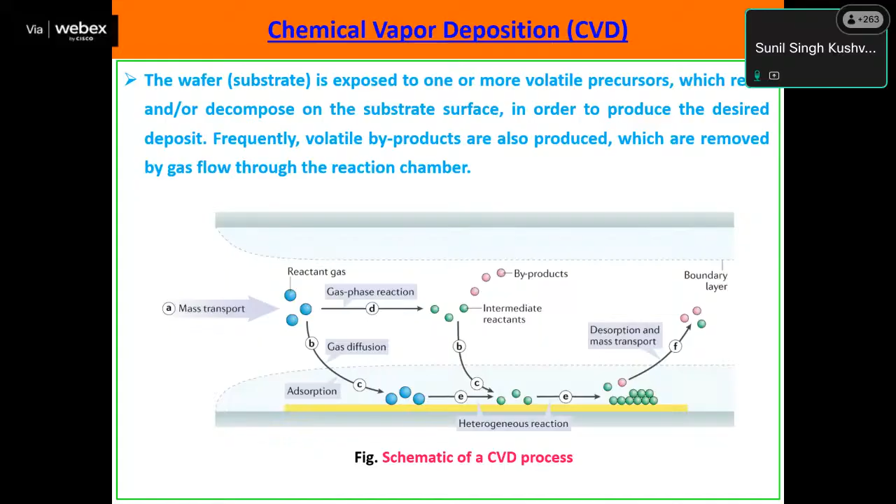This CVD process has advantages, like you can make very large area devices, and it is a repeatable process, because once you know the temperature, the growth zone, and the material you use, you can change accordingly. But the limitation is, of course, the byproducts of CVD. You should know what the byproducts are, then you can neutralize them, because we can't make our environment hazardous during the CVD process.

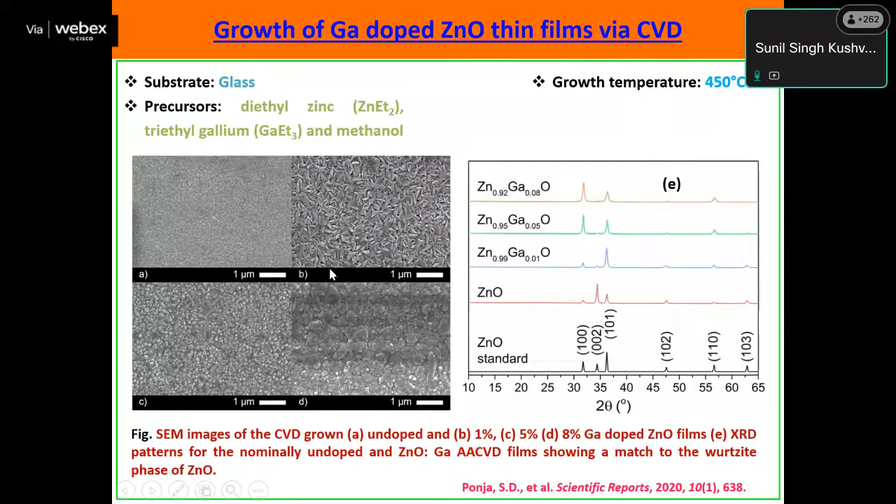So this is the whole procedure. People know that if you have expertise in both chemistry and physics, and if you have a low budget, you can still go for the CVD process and do wonderful work in case of 2D materials and even oxide and other selenide and sulfide materials.

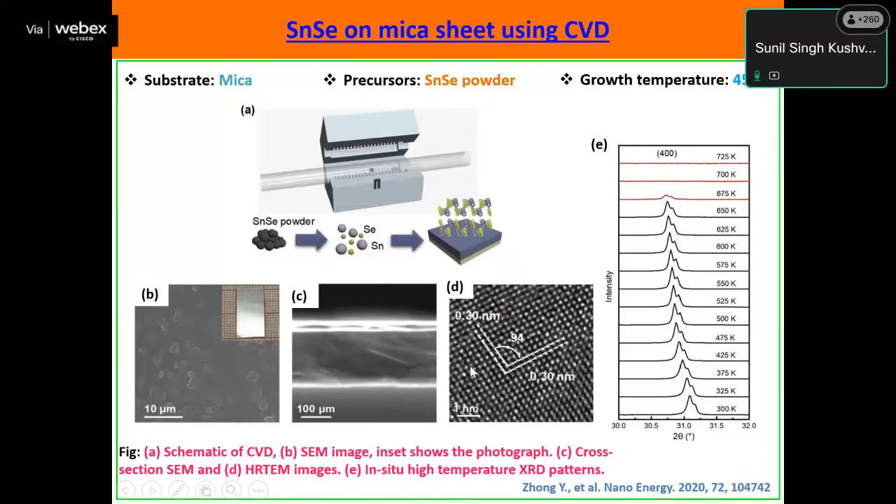This is one example, like SnSe seeds, which they can make using even single zone CVD. They have SnSe powder, and after growing it, they get very high quality SnSe even on the mica sheet.

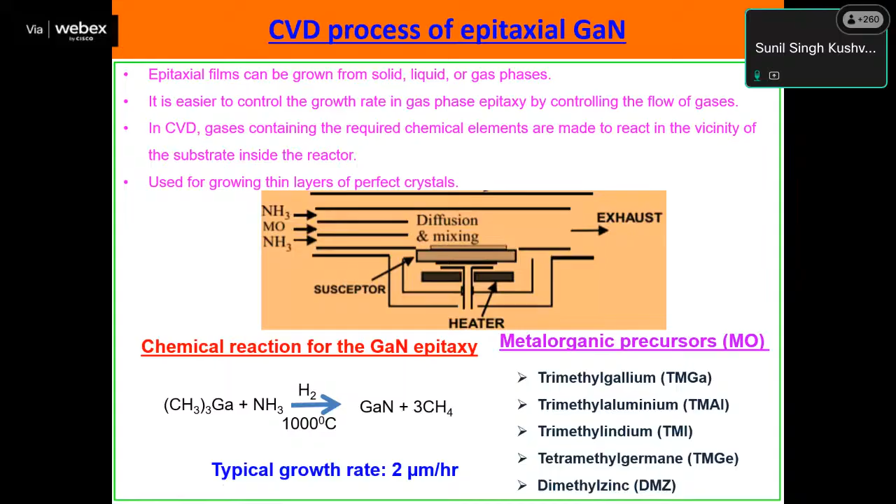But of course the growth rate is very high, about 2 micrometers or more than 2 micrometers. That means you are not able to control single layers like you can in the MBE process, but sometimes you also require a much thicker film for different purposes. Then this CVD process is as good as any.

MOVPE is basically almost similar to the CVD process, and that's why we call it metal organic vapor phase epitaxy, also termed metal organic chemical vapor deposition. It is the same as the CVD technique, which can be used to grow high purity single crystalline thin films of different materials on different substrates.

So here again you have this gas cabinet, and then the liquid precursor or gas precursor, and accordingly you have different lines - this is the gas precursor line, this is the liquid precursor line. Then after that you have the heating lamps or heating quartz reactor, and from here you can make different films. This is the same as CVD, but more controlled, with different channels for liquid and gases. This is more controlled and mostly used in industry when people have large area thin film deposition - they use MOCVD, but for lab purposes we mostly use the CVD process.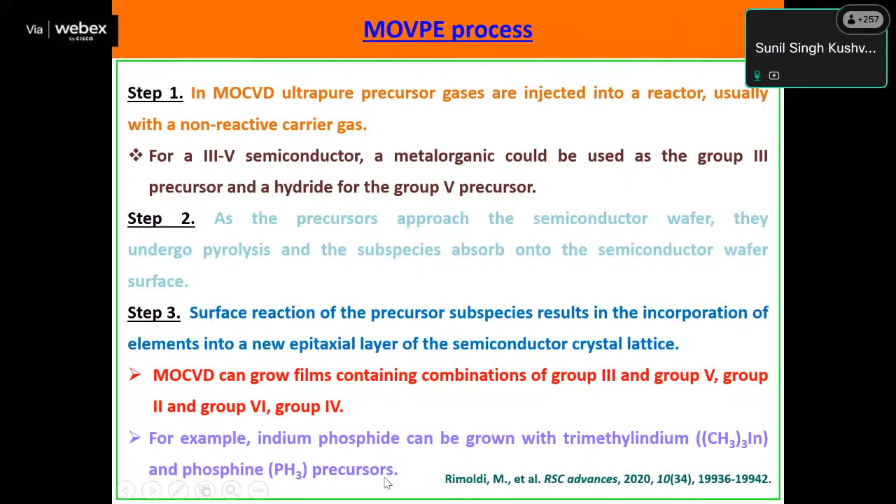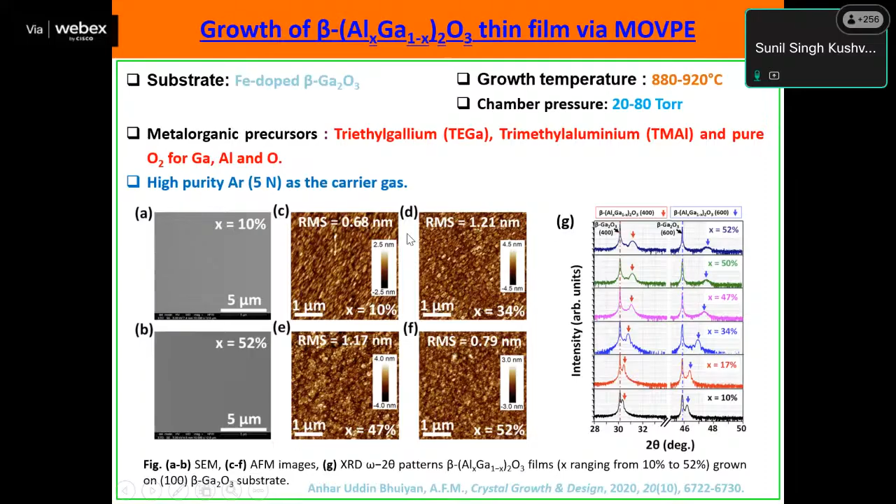It depends on the application. For example, indium phosphide can be grown with trimethyl indium and phosphine precursors. It depends on the precursor, and accordingly we can choose different materials. People use MOCVD to grow gallium oxide thin films, getting single crystalline, highly crystalline gallium oxide for different purposes. They even use doping of aluminum on gallium oxide using MOCVD. For aluminum nitride thin films, we can use trimethyl aluminum and ammonia as precursors, and we're able to get high quality films with very low rocking curve, showing the high quality of the film.

So yeah. If time permits, I will just take 5 to 10 minutes for my favorite topic, the surface characterization techniques. Manoj ji, do we have time? Yes sir, 5 minutes. Yes sir, that will be nice actually, at least to have an idea how we can see such highly oriented thin films. Okay, thank you.

So I'm going to go over surface characterization techniques. You can see the name here - we put this scanning probe microscopy technique. I'm going to focus on scanning probe microscopy, especially scanning tunneling microscopy, because during my presentation I have shown a lot of atomic force microscopy images for different purposes. So let me come to this one - I'll talk 5 to 10 minutes on STM.

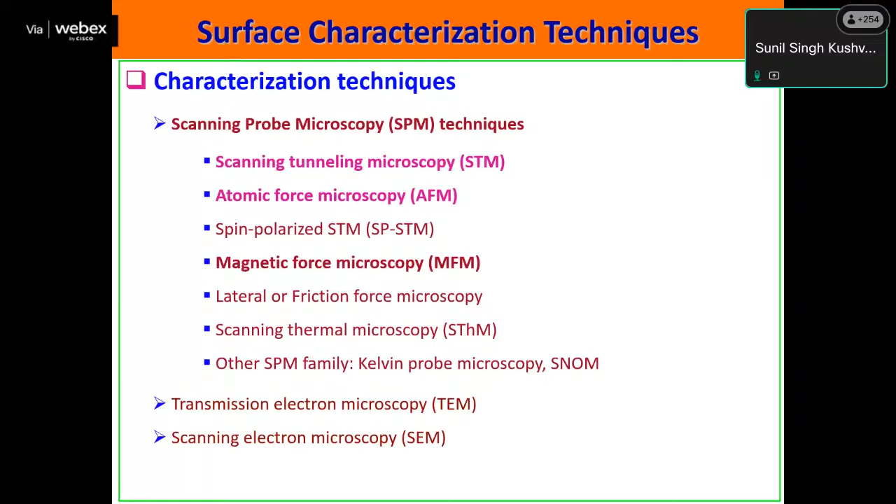So these are two images for surface morphology taken from SEM, that is scanning electron microscope. We can see hexagonal or triangular 2D MoS2 structures, and here we have worm-type morphology of the thin films. But from SEM images, unless we do cross-sectional analysis which is complicated, we can't see the height of this 2D island or layer on silicon. Similarly, if we have this worm-type structure, we don't know the surface roughness - whether it's 100 nanometer, 2 nanometer, etc. And third, whether we can do atomic scale imaging - of course not, because SEM has a resolution of maybe 1 nanometer or 0.5 nanometer.

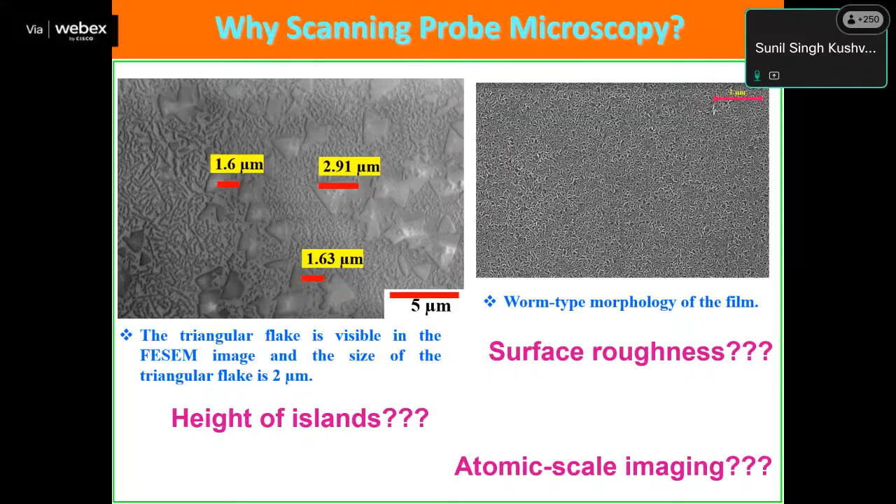That's why we have to move toward scanning probe microscopy, because with it we have all three directional scanning. SEM has only two directional X and Y, but scanning probe microscopy can move in X, Y, and Z. As we are ending, maybe next week, this quantum materials talk will conclude, so one technique really based on quantum principles is STM.

This is one of the famous cartoons - there's a line here, an impenetrable barrier, and a man standing here. It means you have a wall, and the line is here, so you are safe in your house because you are considering the object as a classical particle with defined mass and energy. But what happens if we consider it as a quantum particle at this line?

So it means we have the tunnel effect. Then of course there is no way that man will be standing here, but he has to run away. So on the same principle, scanning tunneling microscopy has been invented.

And here we have this STM tip. This is the metal tip and this is the sample. Of course, the only limitation is that STM can mostly do semiconductors and metals. Insulators are not possible because we have to have this some kind of tunneling current.

So if we see, this is the simple design. You have the STM tip, but here you have this kind of control voltage or piezo, connected with the piezo voltage. So you have the loop means devices here. Then from here you can control the sample and tip distance, and accordingly you can select which way you are going to do this scanning tunneling microscopy scanning.

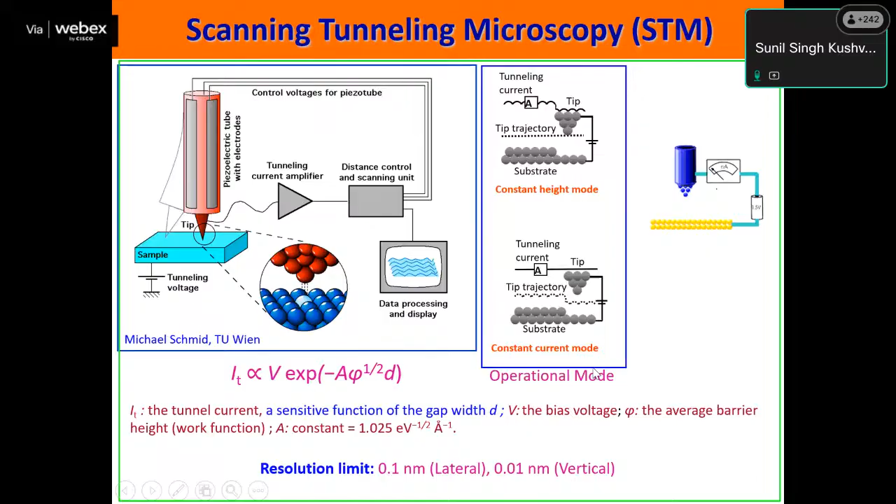So this is just the working principle, simply. We have this tip, which is a metallic tip, whether tungsten or platinum iridium, and then we have different samples. For example, considering semiconductors, once we apply a positive sample bias, we call this the empty state.

Because current is flowing from the tip, electrons flowing from the tip to the sample, and vice versa. Once we have the filled state, meaning if we have negative bias voltage on the sample, then it means electrons are flowing from the sample to the tip.

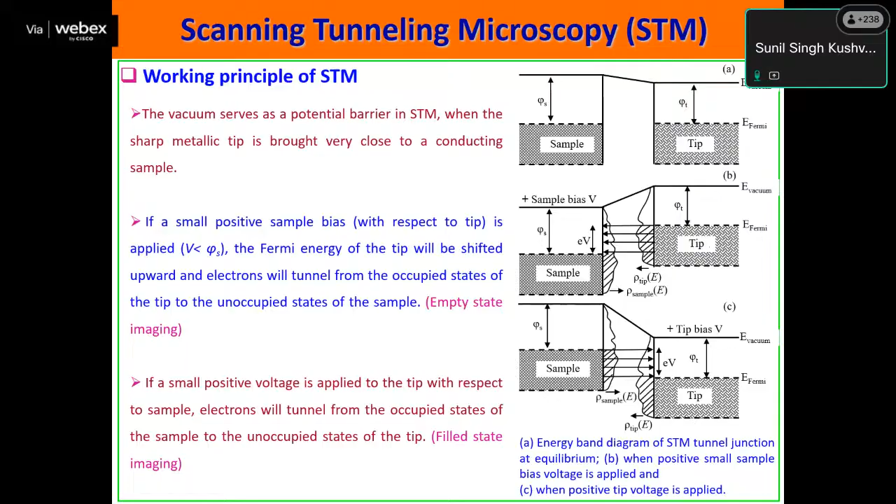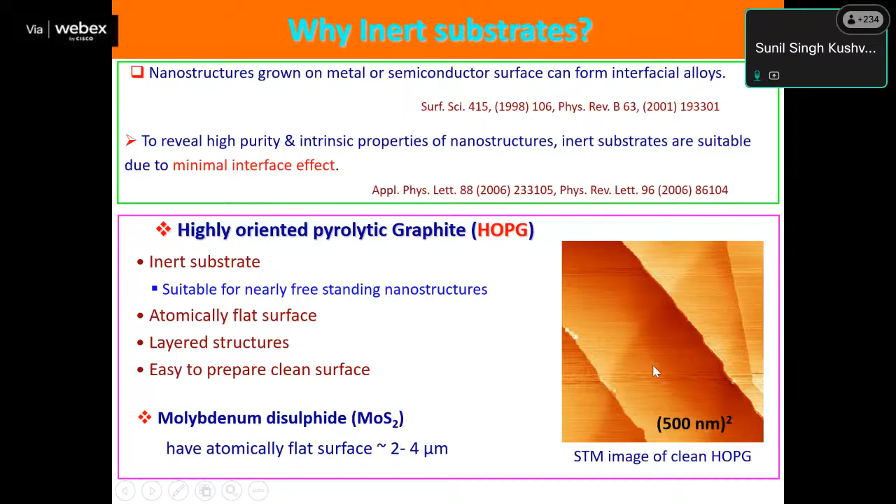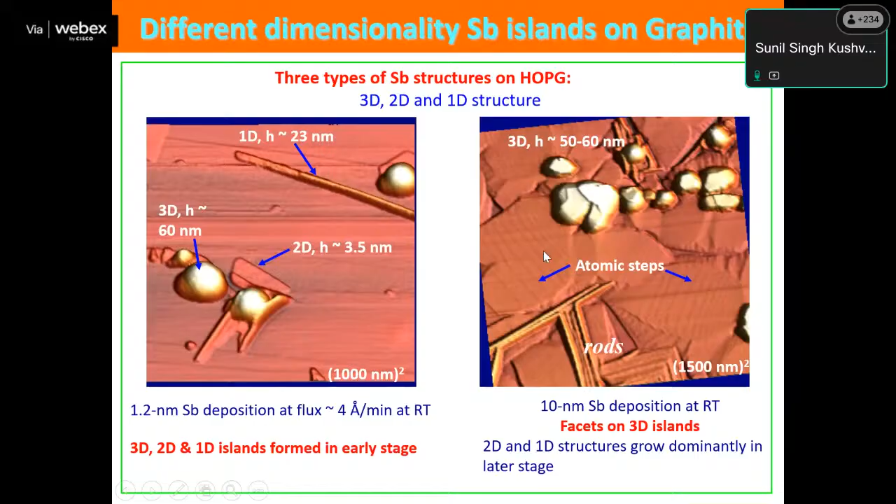For example, we grow different nanostructures, like 3D structures, 2D structures, 1D structures, and after that we also control the 3D islands. For example, we are able to grow only 3D antimony islands.

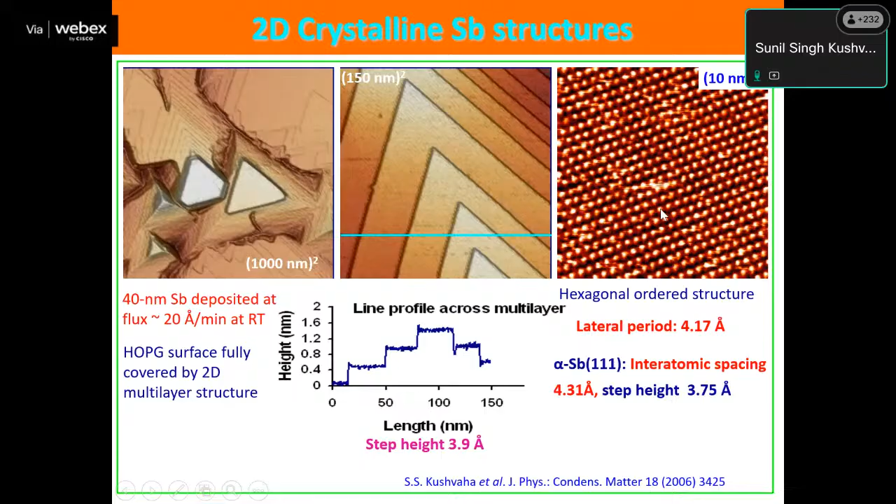So same thing we can do for the different structures, it looks like 3D, 2D, 1D, but once we go to the 1D nanorods, we are able to see it is not the antimony 111 structure, but showing the antimony 110 structure. This is even from the same material - we have different structures, and different structures have different nano or different crystalline structure.

That is something we can only do from in situ, because we are not exposing - we are growing the film, and from the same chamber after growth we move the STM stage without breaking the vacuum. The vacuum is always 10 minus 10 millibar. Then we are able to scan, and we can clearly see this kind of crystalline structure.